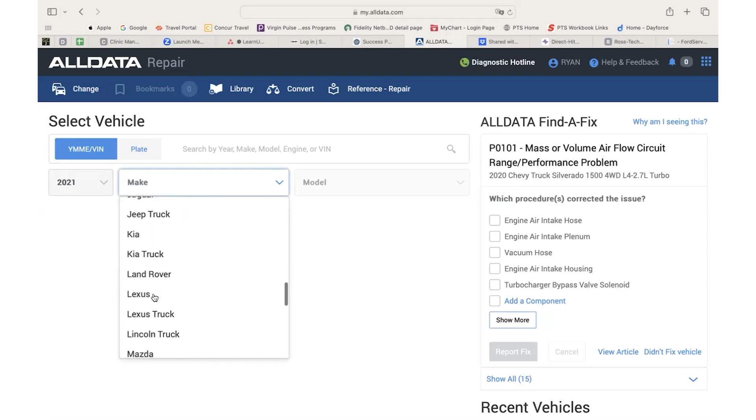So obviously we're going to build the vehicle first. I will scroll through, and we get down to Lincoln truck, and it's an Aviator all-wheel drive. And now it gives us two different options for the powertrain here. As mentioned, this is a plug-in hybrid vehicle. So we select that. And now you can see we've got a lot of information here on the screen. Starting on the left side, we've got diagnostic trouble codes, service tables, TSBs, diagrams, specifications, parts and labor, maintenance.

And one of the first things I want to say here is there's multiple paths to get to the same thing. And that's why I want to run through and show how I find something. Chris might run through the same thing and show how he finds the same thing as well. So that's one interesting thing about service information. There's multiple paths to get there. But because this is a purpose-driven research, let's take a look here.

So in the middle of the screen here, we can see high voltage system, disable, enable EV or HEV, high voltage system, disable, enable hybrid, and hybrid electric drive system. So sometimes we might have to search to find what we're looking for, and they might actually all take us to the same place here. So let's just click on the first one there, and that only gives us parts and labor. So that's going to be what it takes to actually deactivate and power the system down. Okay, well, that doesn't help us a whole lot. I want to know how to actually do it. So I'll click on it again.

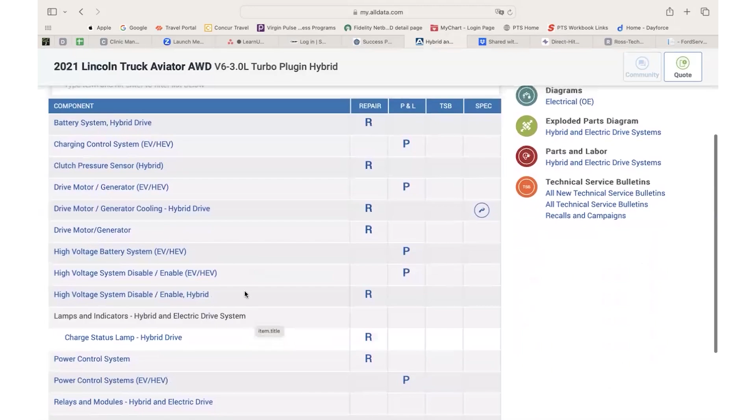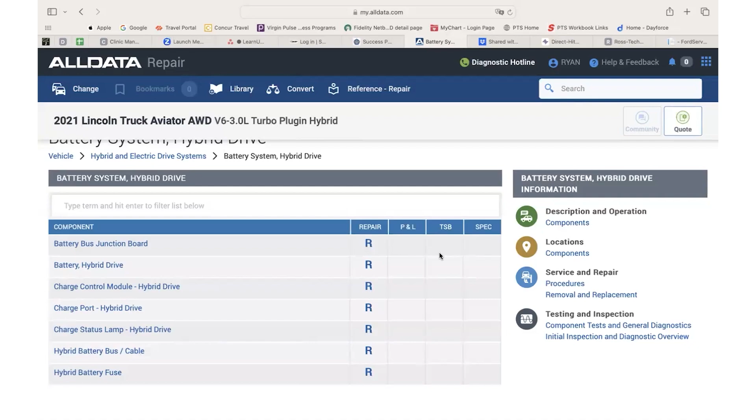You know, let's say we're going to have to go in and replace the battery. So we can click on that. Now we can find all the different components here listed. Hot links, we can connect to them. If you look on the side here, there's an R that shows us or indicates that there's repair information. If there's parts and labor information, that'd be in the next column. If there's a specific TSB, it'd be in the next column, or a specification, that'd be in the following column.

So if I back up and let's try and see, here's another example where it's got just the parts. Most cases, you're going to find them merged together, but because this is a newer vehicle, I'm assuming it was just entered in this way here.

That reminds me of one additional tip. I don't want to be married to one service information source. Again, sometimes we've got to go to the OEs as mentioned in the introduction there. So I'm going to share one of my favorites with you here. This is motorcraftservice.com. Now you can create an account here. You can go in, you can do a lot of stuff there.

But if you go down to the bottom here, you'll see site features, download software, calibration files. This is where if you've got the tool or you're doing module programming, you're going to find the files there for that. Let's say you've replaced a module. In the Ford world, you need to know the module as-built data. If the previous module was bricked, you were unable to pull the information out of it, this is where you're going to go in and obtain the as-built data, diagnostic tool support, etc.

But this is one of my favorites right here, free resources. As I click on free resources, I can find OBD2 theory and operation for different makes and models of these Ford vehicles, owner information, instruction sheets, CD or paper manuals, rescue cards, quick guides, and information about tools and equipment here. So let's click on quick guides.

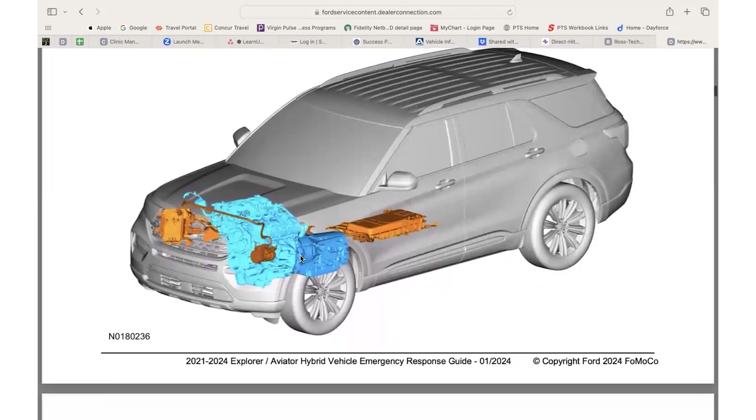And so this is a free resource. I paid nothing here. I don't have a subscription. I'm not even giving them my name or information. And I can scroll through and find out a ton of information about the high voltage system on this vehicle. See all the different components here, how they're laid out, how they work. I can also find out how to deactivate and take care of it here. So a lot of great information here for free on motorcraftservice.com. So let's go back to ALLDATA here and look a little bit further.

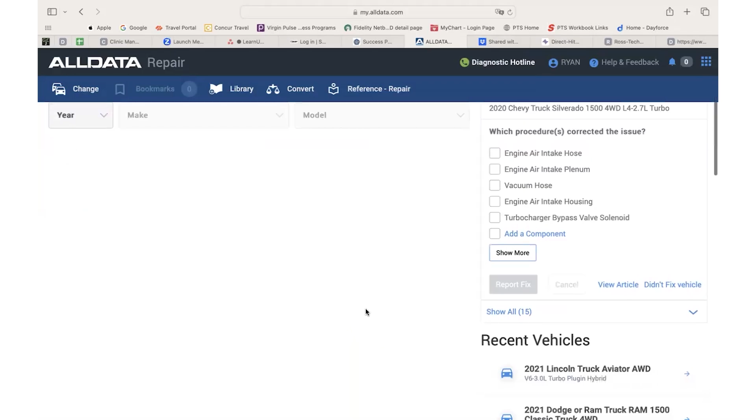So we've seen some information here, but I'm going to click in the upper left and change vehicles. Now, going back to some recent conversations with some friends. Recently, a friend texted me and said, hey, I've got this 2023 Silverado and I'm replacing the front axle. This thing was in an accident, so he had to replace the front carrier assembly, basically. What are some of the torque specifications on that? He wants to do it right. And so that's where we can come here.

If we look on the left-hand side, you see specifications. I could go into front axle carrier information, but by going to specifications here, now I will select mechanical specifications. And we're going to get down to, I believe it's probably going to be in the axle shaft assembly.

Now you'll notice I'm scrolling here left and right with my mouse. For some reason on some of these newer ones, a little bit of it's hidden on the right-hand side there. It also shows us what the wheel lug nut should be on that particular one. So if I go back out, now you'll notice I referred to that in foot-pounds of torque. That's what I'm familiar with, but also there's other specifications given there.

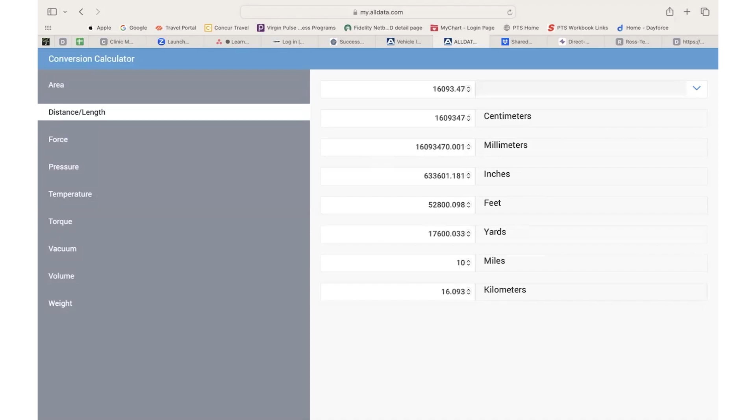So you can type in a number and notice how it updated everything right there. So if I want to know how many feet are in a mile, whoops, there we go. 5,280 feet. And so it's a nice chart here. Reference, volume, weight, torque specifications, going from foot-pounds to inch-pounds, etc. So back to the vehicle here.

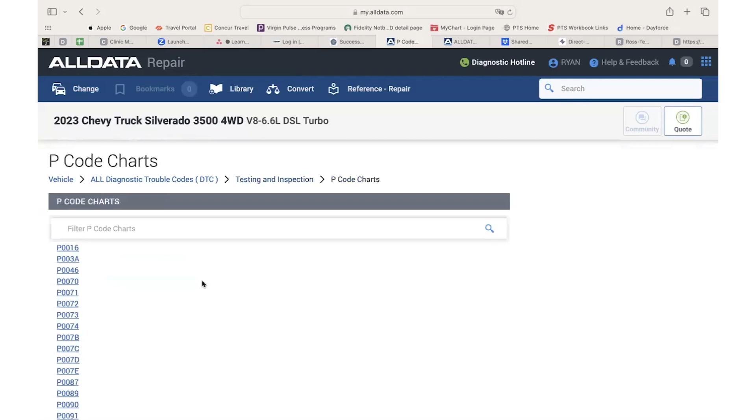Now, let's say that the check engine light's on, and this is one of my favorite features that I always recommend, and I'm still very frustrated by lack of seeing technicians do this. But let's say the check engine light's on. Let's go something simple like a P0101. Now, granted, in today's vehicles, we don't see a whole lot of P0 codes because there's so many new trouble codes written. We're quite often going to see a manufacturer-specific code written there.

But this is what I want to drive home to everybody. It's so important to understand the code descriptor here. So this is a 101 mass airflow sensor performance. It's not a low voltage, it's not a high voltage code. There's separate codes for those, which are going to be related to the circuit or the voltage here. This is a performance code.

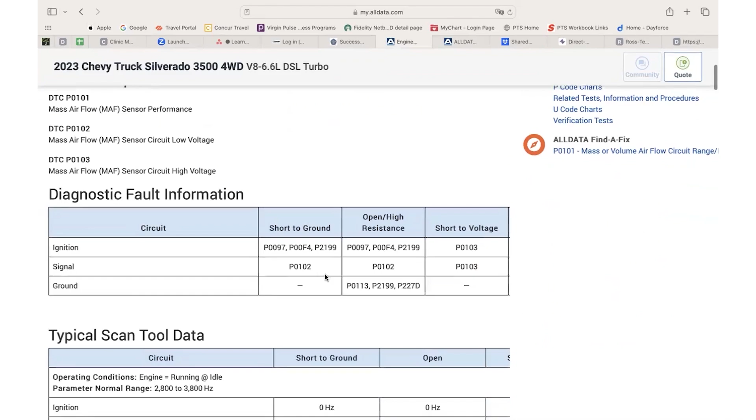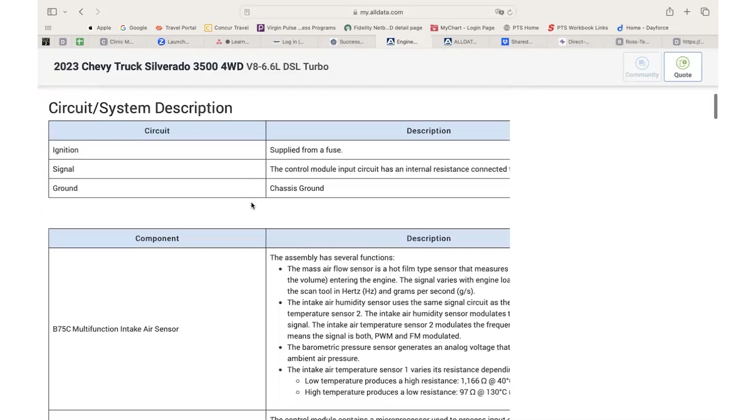And so if we look here, I love this. We can see the three different terminals here and what would happen if it was shorted to ground, open or high resistance, or shorted to voltage here. Gives some scan tool information here. Circuit system description. Good information to know. Don't forget, sometimes you got to scroll to get all the information here.

But what I want to see the most here, what are the conditions for running the DTC? I can tell you many times when I was working in the shop or even talking to other technicians, especially when it comes down to evap emissions code. Oh, I've got this large leak code, but I can't find a leak. Well, what are the conditions for running it? And then they look at the criteria and go, oh yeah, it's 3 degrees outside, so the monitor's not going to run. Or the fuel tank's full, it's not going to run the monitor.

If we're going to test this, we have to make sure that all the conditions are proper to replicate the conditions for setting the trouble code. And then how's that trouble code going to set here? And so the ratio between the measured and estimated airflow is too low. So the GM software engineers are very smart.

They program into the control module by looking at other stuff such as throttle position, engine RPM. Maybe it's even got a MAP sensor somewhere on it. And it's going to determine at that condition what the mass airflow reading should be. It's going to use it kind of like a double check here. And if it's setting this code, it means that ratio between the estimated and what was truly measured there is different.

And for greater than 1 second. So this isn't one of those quick, 2/10 of a second or 3 milliseconds codes. This is for greater than 1 second. It's a long time in monitoring conditions. What happens when that sets? Well, basically the check engine light's going to come on. We're going to see some other codes set it into a diagnostic limp-in or a fail-safe mode, if you will. This one doesn't necessarily do that.

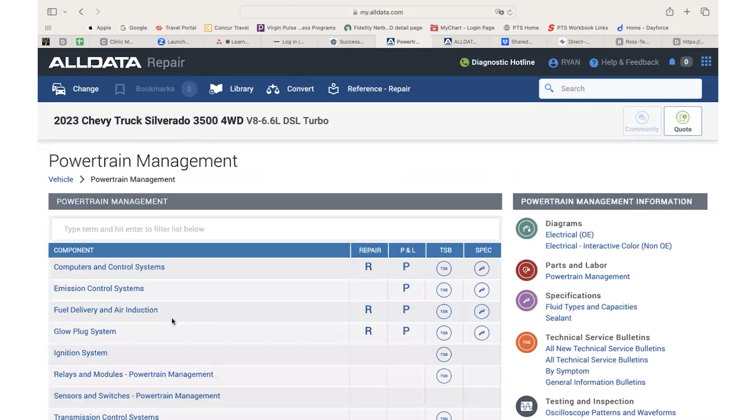Now let's say we're going to go ahead and replace the mass airflow sensor. Well, it's pretty straightforward, right? But maybe there's a relearn or something that has to be done. So you're going to find your engine management stuff under powertrain management. Now it might be under multiples of these here. So we've got computers and control systems, fuel delivery and air induction, emissions control system. We've also got sensors and switches. So I'll click on that.

Mass airflow was not under that one. Let's try under, there we go. So sometimes you have to click on a couple different ones here. So there's the removal and replacement information. So now install. And so one of the things I'm always looking for here, is there a reset procedure? Now, sometimes with the mass airflow, it's actually called in the GM world a weather station. And so there is going to be additional stuff that you have to do here. And so it's always nice to look this up.

Again, I get a lot of phone calls or conversations with technicians of I installed the part 3 times and still didn't fix it. Well, was there a relearn procedure that had to be done afterwards or clear out adaptive memories, something like that? On this particular one, there's not. So I'm going to click on vehicle, bring me back to the home page here, and we see just kind of all the information here again.

Now, this is a conversation that came up with somebody on the product team recently about a power window switch and a customer having some confusion on that. And so I'm going to click on Windows and Glass. And so this gives all the different components or categories related to Windows and Glass. And so now if I click on Power Window Switch, Service and Repair, now it gives me all the different switches. So I'm looking at the driver, the main one here. And so click on that.

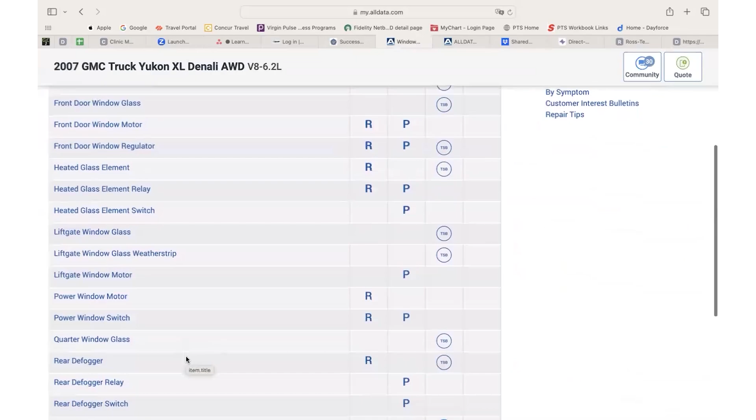So if I change this and I go back to some other vehicles here and look on the side, these are just some of the vehicles I had worked on previously. If I pull up a 2007 GMC Yukon Denali, click on Windows and Glass, and kind of same thing. I'm going to click on power window switch, service information. So I'm going to do driver side switch. Same thing. Shows to go through here. So pretty straightforward. Does not look like programming is required.

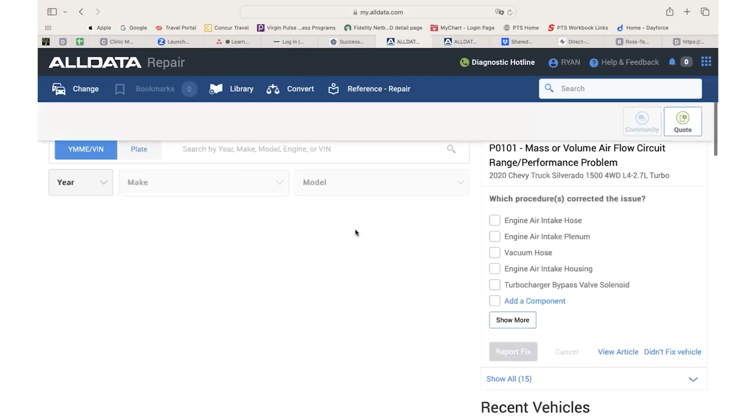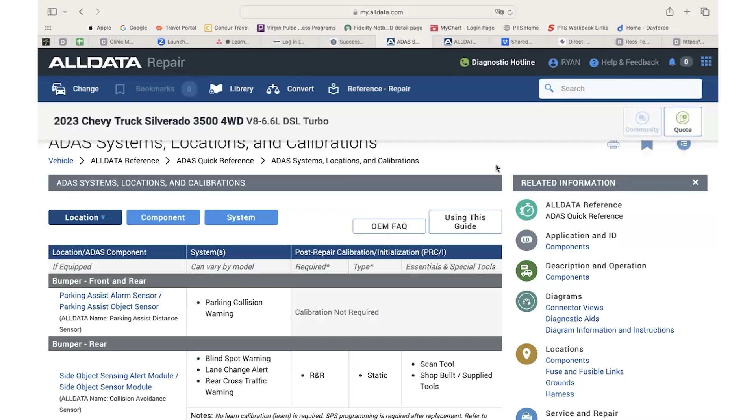Now, let me quick go back to that newer truck a second. One thing I wanted to cover here before I get too far, and you'll notice why I'm going back to this new truck, and it wasn't on that '07. There's an ADAS quick reference over here in the upper right-hand side. And so if I click on that, this is very helpful if you're doing any type of work on these newer vehicles, such as suspension or removing the front bumper, or doing something to the front of the vehicle. For example, this particular truck that my friend is working on has been in an accident; if the front bumper has to be replaced, well, there's some sensors in there.

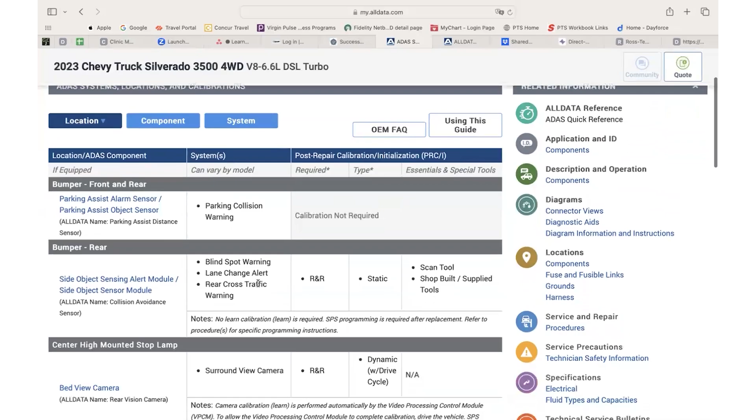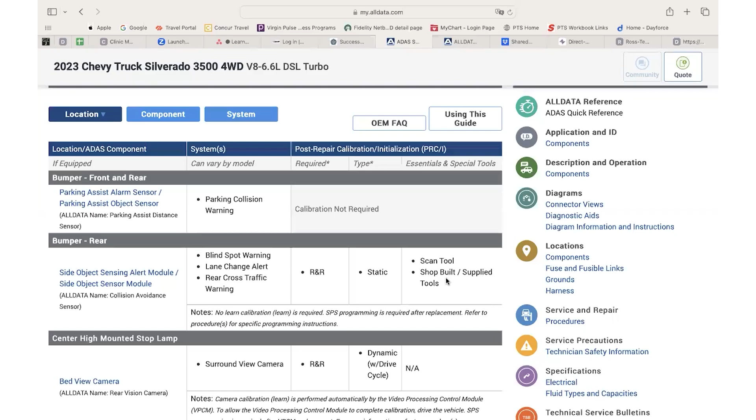He needs to know, does it need to be recalibrated? So here we look, and we've got park assist sensors in the front bumper. It says calibration not required. Now in the rear, there's blind spot warning, etc. Additional components there. If it's been removed and replaced, now there's a static calibration in which we need to use a scan tool, and then also the additional setups there.

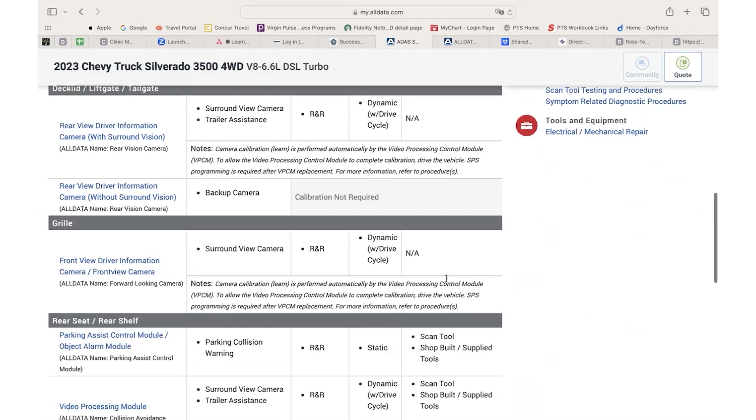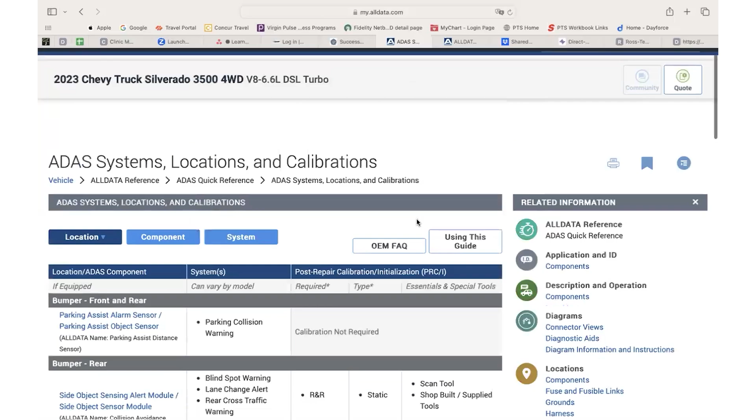And so this ADAS quick reference is very helpful to understand, hey, before I touch this, do I have to do any additional work? And so you can see some stuff is calibration not required. Some of them, if you're going to remove the front grille here, because it's got the surround view camera, now you're going to be doing a dynamic calibration with it. Got some other ones here with static, others with dynamic. Again, if you replace the seat, calibration not required, etc. So very helpful to understand. And that's found in the upper right-hand corner here at the ADAS quick reference guide.

So now let's go into another situation here before I hand it over to Chris. And this is actually a vehicle he's working on diagnosing here. This is a 2012 Audi Quattro. The customer's concern is that the check engine light's on. It's been to two different shops, kind of getting thrown back and forth. And so I said, hey, will you help us out here?

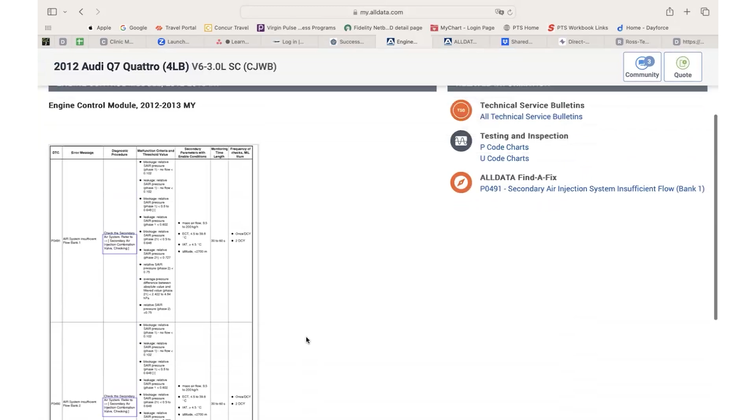So we're going to look up the trouble code here. It's a P0491 and P0492. I will continue scrolling all the way down here. If you're familiar with the VW Audi world, you understand that there's actually different codes other than the P codes. But this is what we're going to focus on right now. If we click on that, you can see that this is basically a screenshot. I'm going to zoom in. So starting on the left-hand side, P0491, air system insufficient flow bank 1. It also had a P0492, which is for bank 2.

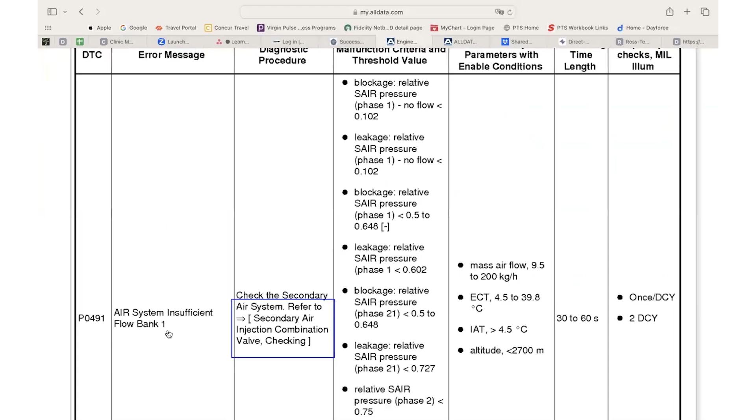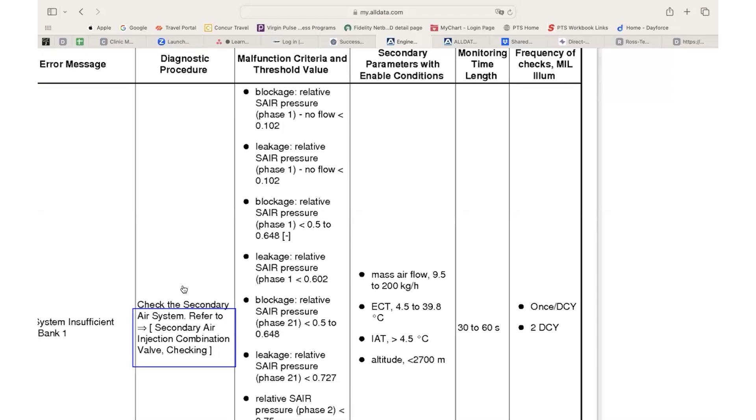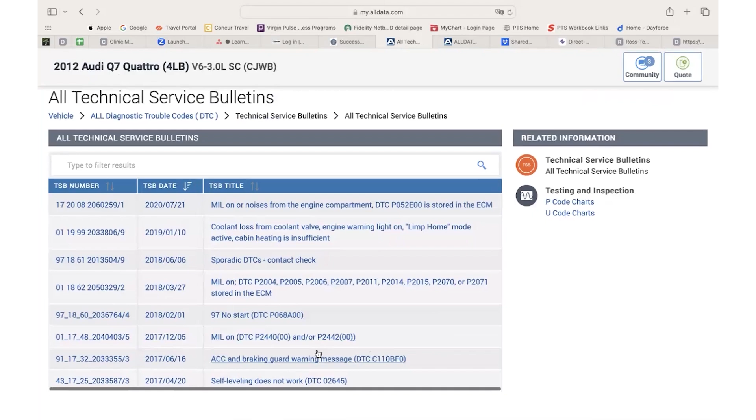Now it says check the secondary air system, refer to secondary air injection combination valve checking. So we've got some information here, but not a whole lot, right? It doesn't really help us. What do we do? I don't know a whole lot about this system. Well, there are technical service bulletins on the right-hand side here. So I'm going to click on that and scroll through and see if our trouble code is there. I don't see anything about the secondary air system or our particular code. So I'm going to back up from that.

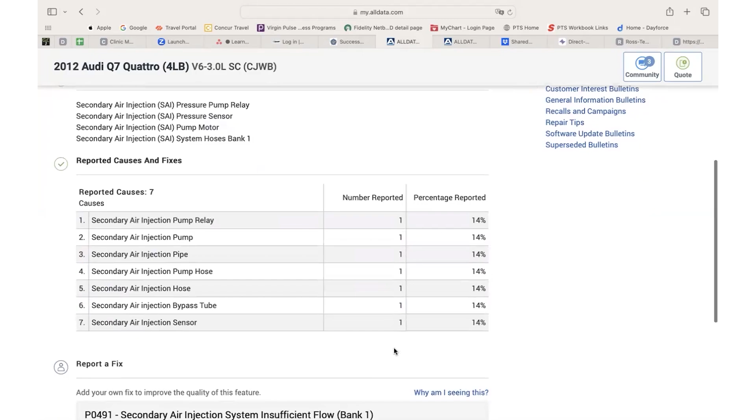There is the ALLDATA Find a Fix area here. So I will click on that. We can see the code, the system descriptor, probable causes. And if we look here, multiple options of things to do. So I really don't feel warm and fuzzy on this. This is where sometimes it's nice to have multiple repair sources.

Now, if you're familiar with VW Audi or a lot of the Euro type platforms, you know that they have different ways of doing the diagnostics. A lot of it's actually based on the scan tool itself. You're going to go through and it's going to say, what is the reading on this? Yes or no? Or you put in the information and it's going to send you down a guided fault finding pathway. So here's where it's beneficial again to have multiple sources of information.

So I will go to Identifix here and look at the Direct-Hit system. I've already built the vehicle, the 2012 Audi Q7, 3-liter gas. I'm going to type in my trouble code here. And actually, it's got both of them. So I'll click on that.

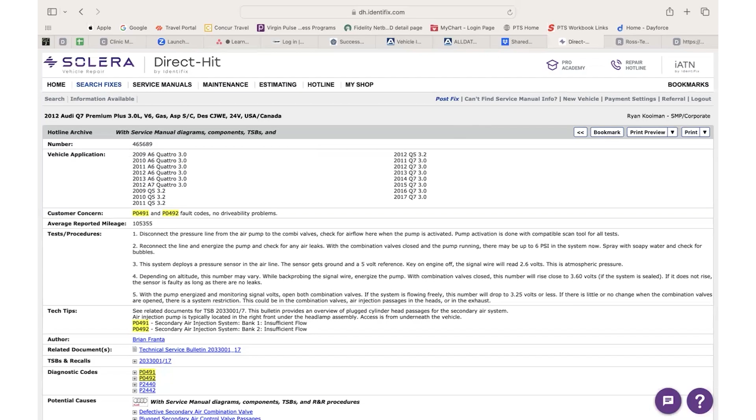And you already covered so much good information on the service information side of what it actually looks like to try to find some of these items in service information, whether it be any of our aftermarket sources like AllData, Mitchell, Identifix, anything like that, or even like you pointed out, where we actually have to go into factory service information to find some of the items if we can't find it in aftermarket service for various reasons. Or do we have to put a request in, like you showed at the very beginning of your portion, of what that looks like to request something in service information.

And so I wanted to go back to the vehicle that you already pointed out, the Audi that we're diagnosing right now, the 2012 Audi Q7. And so I've got that vehicle loaded up on my screen as well. And a couple of key pieces of information that I just wanted to point out. You already did a really good job of showing what we've got on the diagnostic side, when we're looking for those trouble codes or the description of how the system actually works. But let's say I want to do some more testing on that, and I want to get to individual components, and I want to look up wiring diagrams.

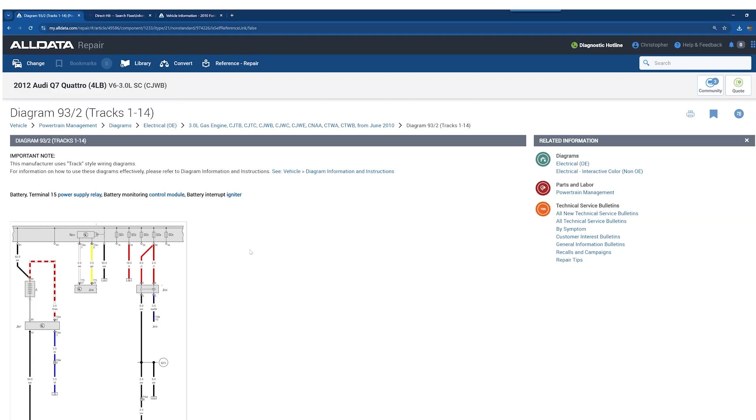And what I want to point out here is this diagram is going to look far different than anything that a lot of technicians are used to seeing if they're not familiar with European wiring diagrams. And this is a diagram that we call a track wiring diagram. And so at the bottom of the diagram, we're going to see what we call the track. And we have all of the numbers listed at the bottom. We have our grounds going to that. And what European makes do really well: if we have an Audi, for instance, here, you'll see that they don't necessarily have the wording of each component on here. They have a letter and a number associated with whatever component we're looking at. And above the diagram gives us an idea of what's going to be included in there.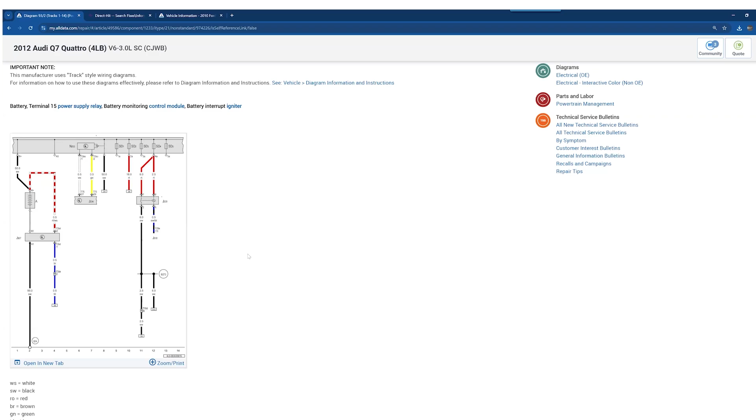But if we scroll down through the legend here, it tells us wiring color, which is going to be really important to understand because this is not necessarily going off of the English word. SW is black, WS is white. So you can see how this isn't WH or something like that for white, BL for black, it's SW, and RO for red.

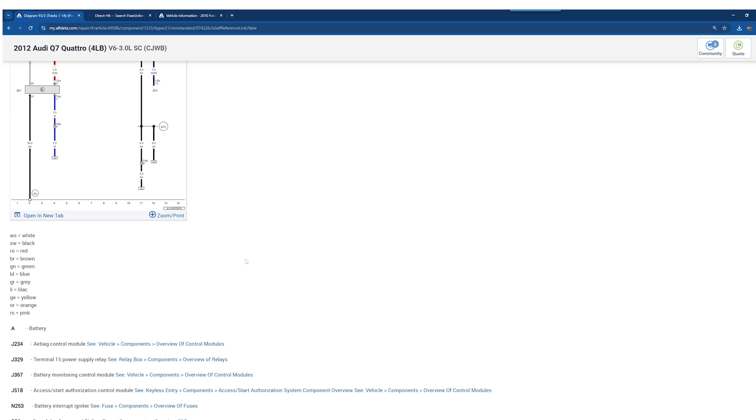So this is coming from the European side and kind of getting translated over for us. So something to be a word of caution for us when we're looking at wire colors. And as we scroll down, like I mentioned, we have components listed in a letter and number form. So for instance, the airbag control module is J234 here.

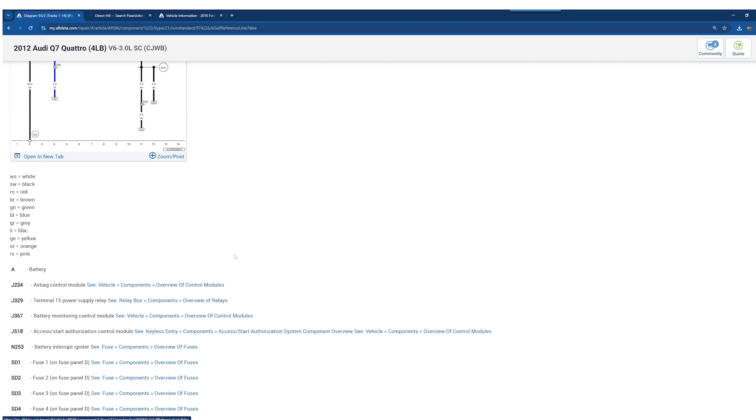And one thing that's nice is once we actually understand this terminology across these makes, it's always going to be that. And so whatever that number is, when we become familiar with that, with our track diagrams, that number is going to be that component. And it makes it a really streamlined process once we go through it. So yes, it is an adjustment from what a lot of us are used to seeing if we're not that familiar with European. However, once we get the hold of it, of what that layout looks like.

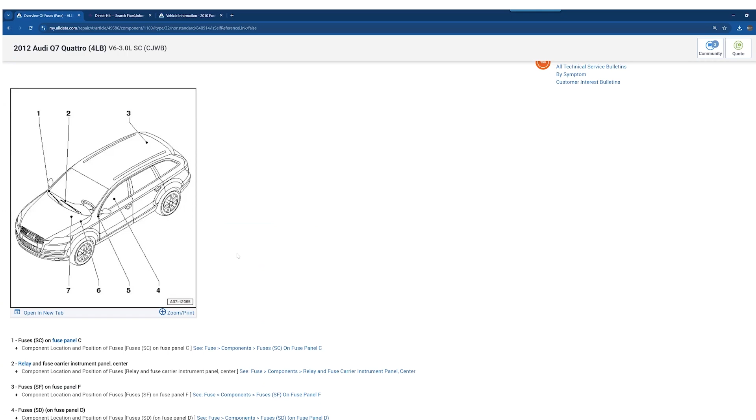For instance, you can kind of see too at the top of this diagram, when I scrolled back up, we've got our power sources up there. We've got our fuses. If I want to find out what SD1 is, I can scroll down. SD1 is fuse 1 on fuse panel D. I can click on the fuses components overview, and it will actually tell me where this is located on the vehicle. And this is testing that I did on here as well, was testing these different fuses, making sure I've got power to that air pump, and then I can test for power and ground.

Now, to the point that you were making on Identifix as well. So I've got the vehicle loaded on Identifix, and we're kind of on the same page of I like to look at it and see, okay, I already read the information as to why does this trouble code set in ALLDATA and how does it set? How is it being monitored by the module? And I'm going to look at the steps that someone created on this test plan for the trouble codes here. And I'm going to see if it's something I want to do.

So not necessarily just look at it and go, okay, 100 people had this problem. This has got to be the issue. But if it's a really fast test and it seems feasible to do, well, I'm going to do that then. And so for here, I can read through it, see if the test is valid. And what we're really looking for is on that trouble code, it's looking for a pressure change through the secondary air system. And it's using the pressure sensor to do that. And it's turning on the pump. So I can do a lot of these things already.

And I'm going to command that pump on with a scan tool. I'm going to verify that it can output air from the secondary air injection pump. If I check that all out, I've already verified a lot of things. I know my power and ground are good, or I can also monitor that air pressure sensor on the system also to see if maybe my point of reference is faulty and that's why it's not seeing the change. So either way, this gives me a lot of good base steps to kind of go off of when looking over that system on there.

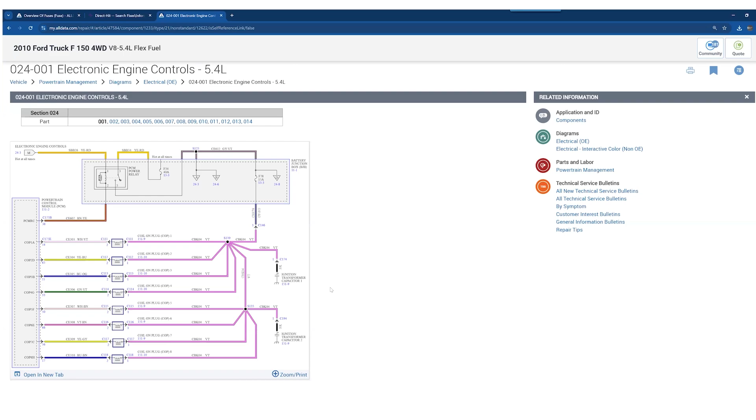So all of these hyperlinks mean something, they're clickable and you can get there. Well, that's not always the case on the aftermarket side. So here, if I click on the wiring diagram, now I should be able to click on these blue hyperlinks. In this instance, because the vehicle's older and it is loaded, this is exactly what I find.

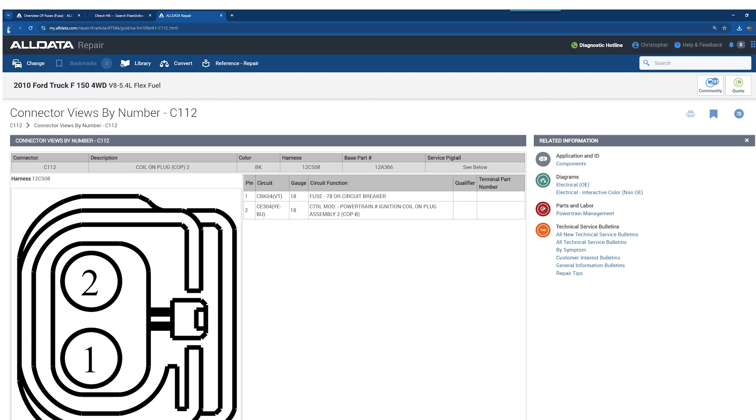Connector C112, it actually links to it. And now I can find the various pieces of information for that connector. So I can look at the connector face, and here it lists all of the information all off of that hyperlink. Now, sometimes these hyperlinks are not actually clickable, or they won't actually source you to the right spot.

And what I want to point out there is sometimes we are going to have to go to OEM service information, or we may have to put in a request to our information source, whether it be Mitchell, ALLDATA, Identifix, anything like that, where we may have to say, hey, I was on this wiring diagram. I'm trying to find out this piece of information from the hyperlink, and it's not linking me over to it. And they will give us the service information for that piece of information.

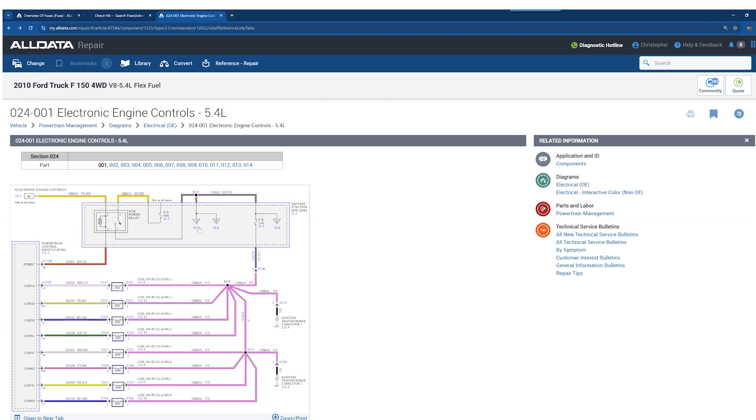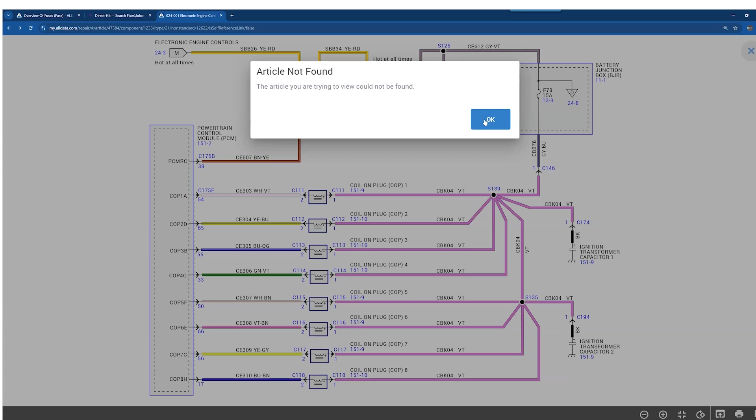So again, these are really great pieces of information from the wiring diagrams that I can click on different things. Here's a great example right here. I just clicked on 24.3 and it says the article is not found. So in this instance here, this would be something where I'm going to have to actually put a request in for that link, or I'm going to have to purchase a short-term subscription to OEM service information in order to find out what that piece of information is that I'm looking for.

So with everything that Ryan covered already, I think he did a great job of going through so many different things of understanding exactly how description and operation is and what the trouble code setting criteria is. So once we have a trouble code, we've pulled it, we know how to actually access that, find all of the information behind it. And to his point, on the right-hand side of the screen, this is one of the big things that I click on first when I'm trying to figure out how to diagnose something. And I may go to description and operation, and then I can actually figure out what's going on with that various system or component.

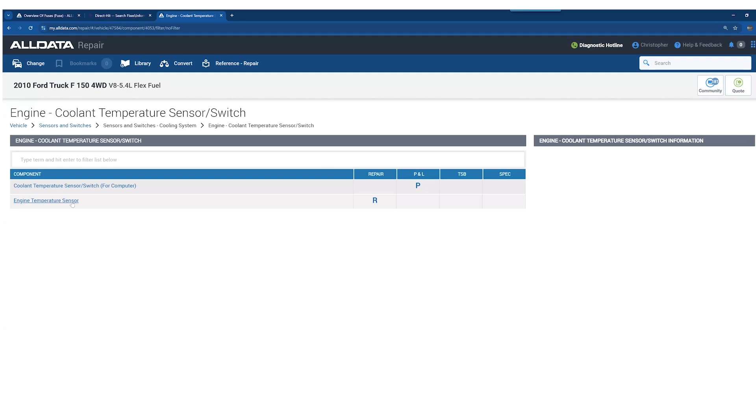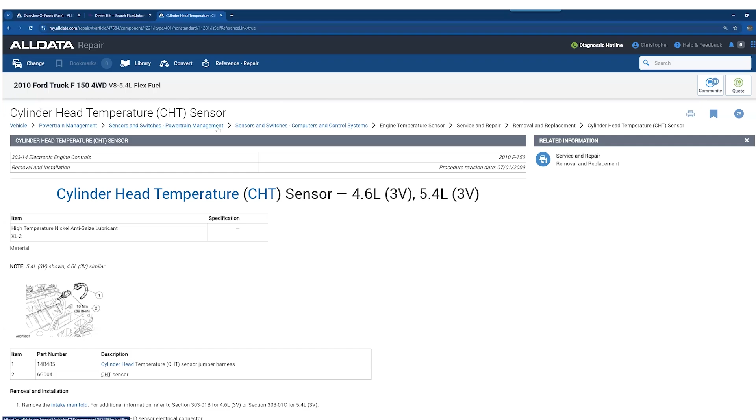So let's say we go to sensors and switches, and I may go to the coolant temperature sensor. If there is any supporting information to this system, sensor, anything like that, there's going to be another tab on the right-hand side, and it will actually say description and operation. And I'll have a lot of supporting information there for me to actually diagnose that system a little further and understand why it sets codes, how it operates, how it monitors it, and what I've got to do to verify that I've actually repaired something properly.

And so if there is further information on that portion of the vehicle, it's going to be found in this description and operation portion. And again, this is going to be under each different system. So I'm going to go to powertrain management, restraints and safety systems. Anything I'm trying to find, I'm going to go over to description and operation and try to read up on exactly how that operates. So with that, this kind of concludes our screen sharing portion, where we've tried to really walk you through a lot of things on screen.

All right. Well, thanks, Chris. That was a lot of information, and I thought I had it figured out. I even learned some more here. You can teach an old dog some new tricks.

So we've covered a lot. Understand that there's multiple sources we need here, and there's maybe even some holes yet, but we've got to look at some of this stuff. So, Corey, I've seen a lot of questions come through. Let's go over a couple of your favorites here. Yeah, and actually I had one that came through that just touched on what you were talking about, multiple sources. So have you run into a situation where the information you need just isn't there? So then what? What's the solution?

Phone a friend, right? Okay. I think that's the best part. But Chris, I'll let you take this one.

Yeah, sure. So we definitely do run into that scenario, especially if we're working at an independent shop or something like that, where we may have an aftermarket source. And so we may run into the scenario where we don't have the information needed at that time for a newer vehicle, something like that.